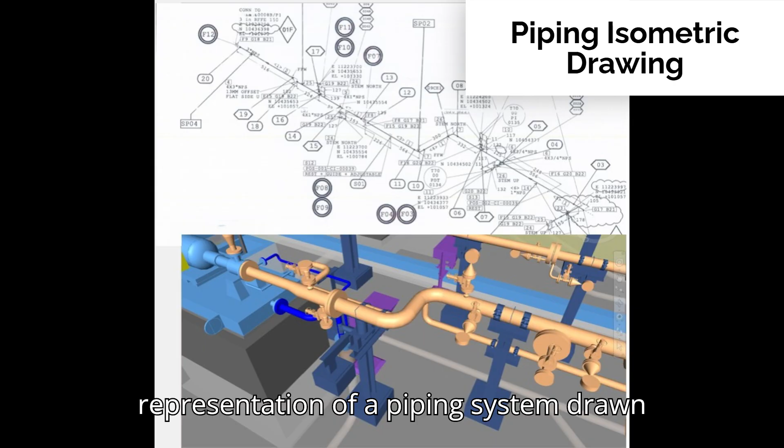What is an isometric? A piping isometric drawing is a 3D representation of a piping system drawn on a 2D plane. Unlike a floor plan or an elevation drawing, an isometric drawing allows the viewer to see the length, width, and depth of a pipe in a single view.

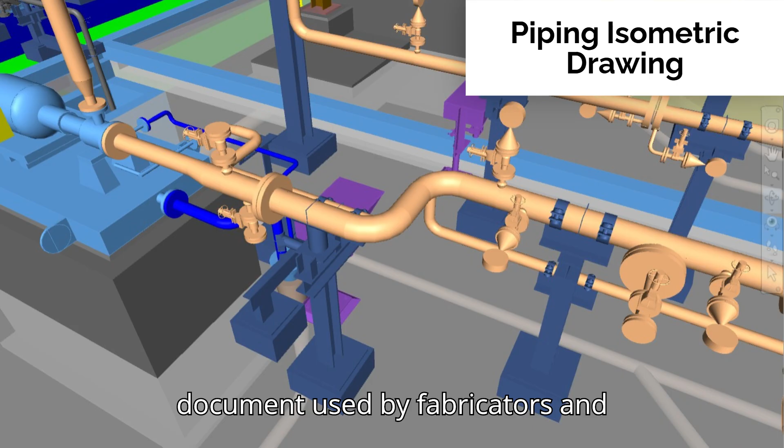A piping isometric is a technical drawing that represents a three-dimensional piping system in a two-dimensional format. It is the primary document used by fabricators and installers because it provides a complete picture of the pipe's routing, dimensions, and materials in one single view.

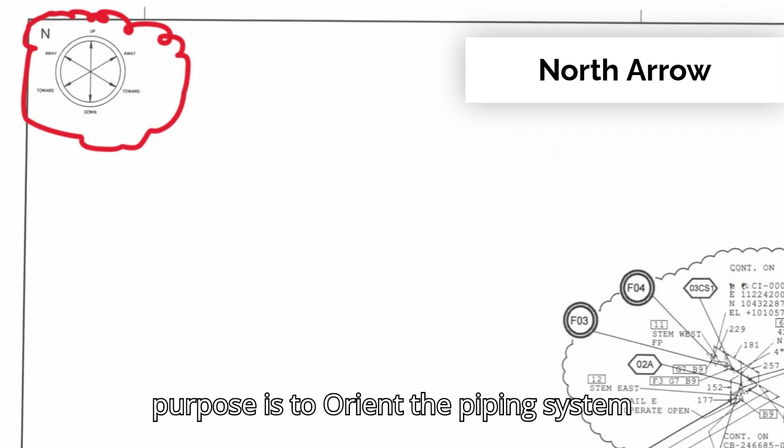North arrow, crucial for orienting the pipe within the plant. Note that plant north might differ from magnetic north. The north arrow is the compass of a piping isometric drawing. Its main purpose is to orient the piping system within the physical space of the industrial plant. Without a north arrow, a fabricator or welder wouldn't know if a pipe should run toward the ocean, the road, or the neighboring tank. The north arrow is almost always placed in one of the top corners of the drawing.

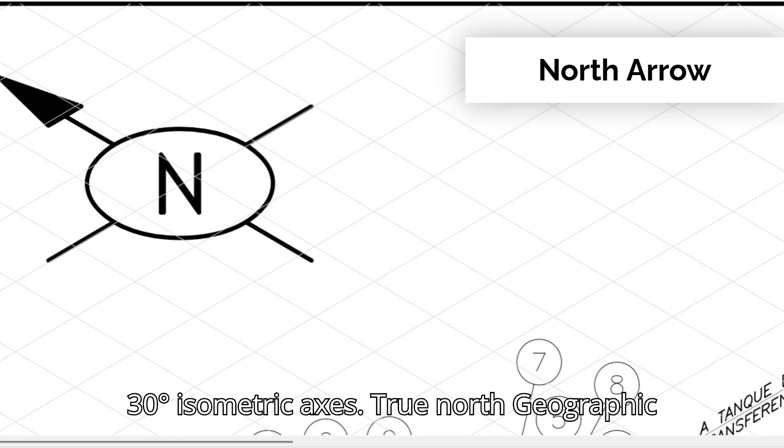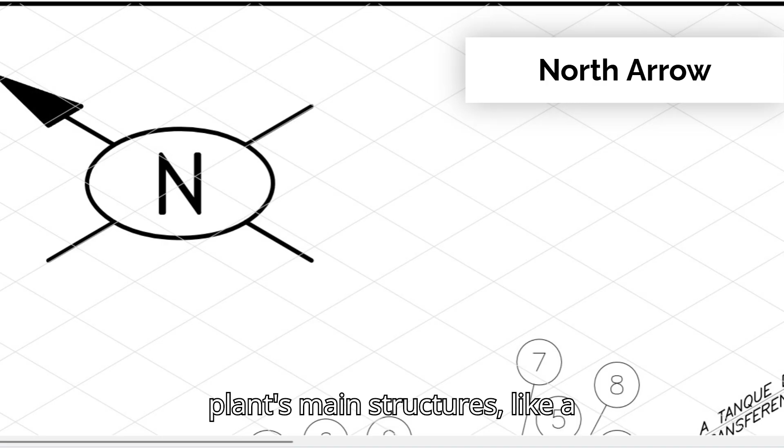It typically points toward the upper right or upper left, aligning with one of the main 30-degree isometric axes. True north, geographic north, the actual direction toward the North Pole. Plant north, project north, a fictional north used by engineers to align with the plant's main structures, like a rectangular building or a fence line. In an isometric drawing, there are no horizontal lines. Everything is drawn on a grid with axes at 30 degrees to the horizontal.

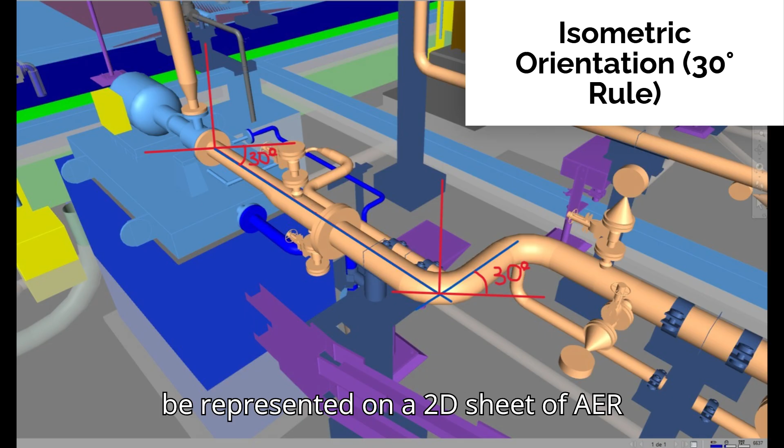This is the central part of the drawing, shown in a 3D perspective, using 30-degree axes. The 30 degrees rule is the fundamental geometric principle that allows a 3D piping system to be represented on a 2D sheet of paper without using perspective. It creates a distorted but highly functional view where you can still use a ruler to measure distances. In a 2D drawing, you have X and Y. In an isometric, we simulate X, Y, and Z using these rules.

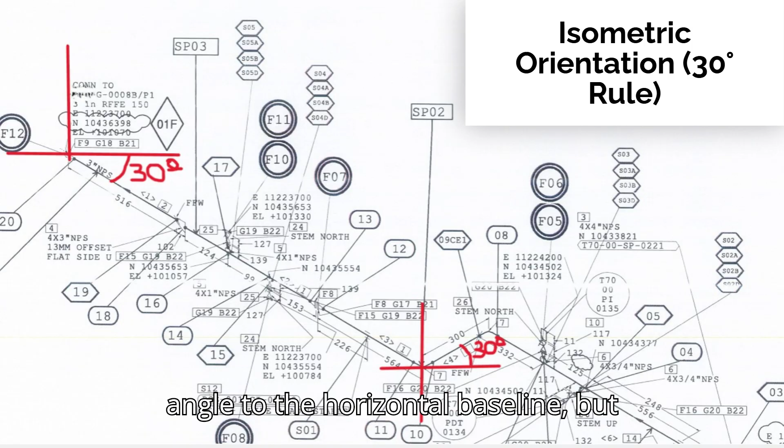Bill of Materials, BOM. The Bill of Materials in a piping isometric is essentially the shopping list or recipe for that specific line. It is a detailed table, usually located in the upper or right-hand corner of the drawing, that lists every single physical component required to fabricate and assemble the system shown. Without a BOM, an isometric is just a picture. With it, it becomes a construction document.

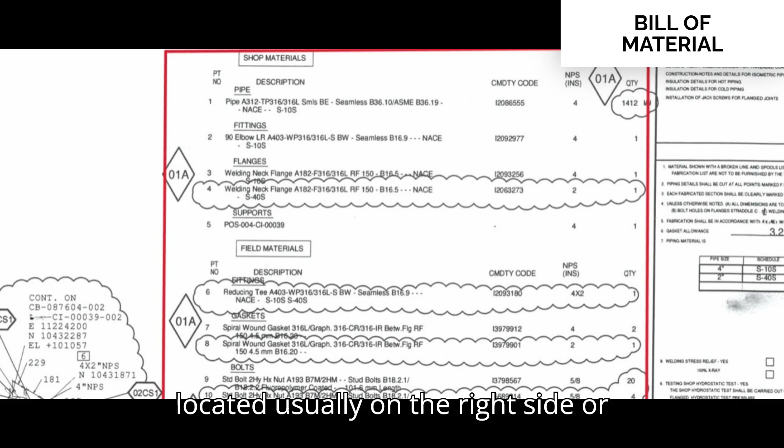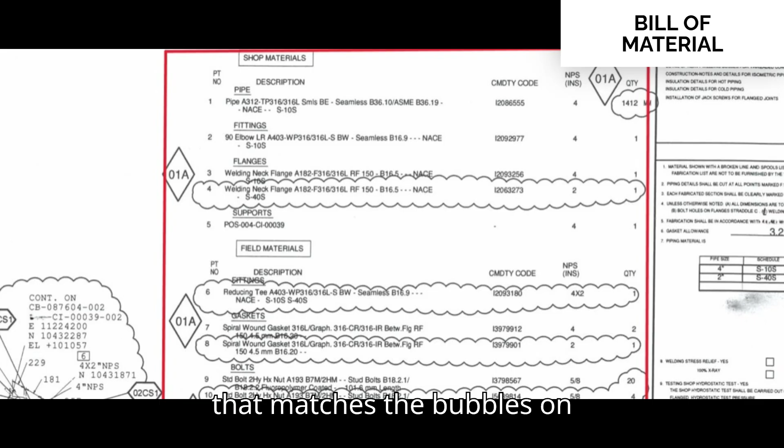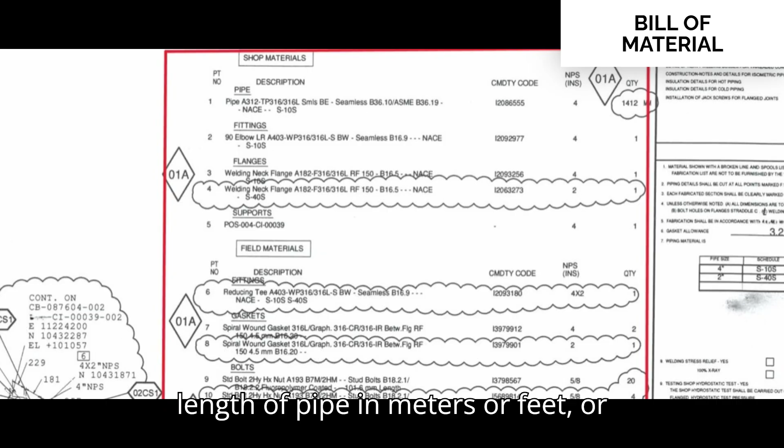Located usually on the right side or top corner, this is the shopping list for the fabrication shop. A standard BOM is divided into columns that provide specific technical data for each part. Item: a reference number that matches the bubbles on the drawing. Description: the full technical name, including type, schedule, rating, and technical specifications, e.g., pipe, seamless, ASTM A106 GR B. Size/NPS: the nominal pipe size of the component. Quantity: total length of pipe, in meters or feet, or the number of pieces for fittings and valves.

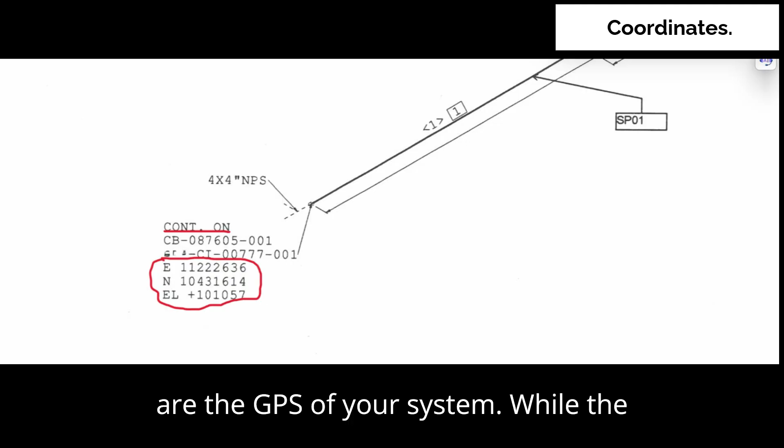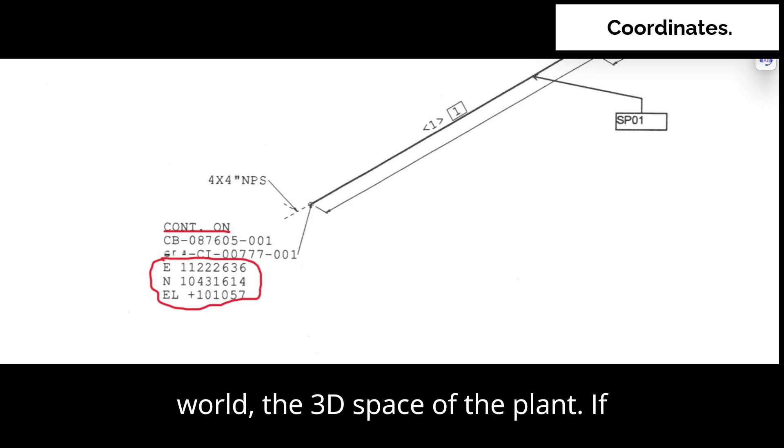Elevations and coordinates. In piping isometrics, elevations and coordinates are the GPS of your system. While the drawing shows you the shape of the pipe, the coordinates tell the installers exactly where that pipe sits in the real world, the 3D space of the plant. If you get these wrong, your pipe might end up trying to occupy the same space as a structural beam or another pipe, a nightmare called a clash.

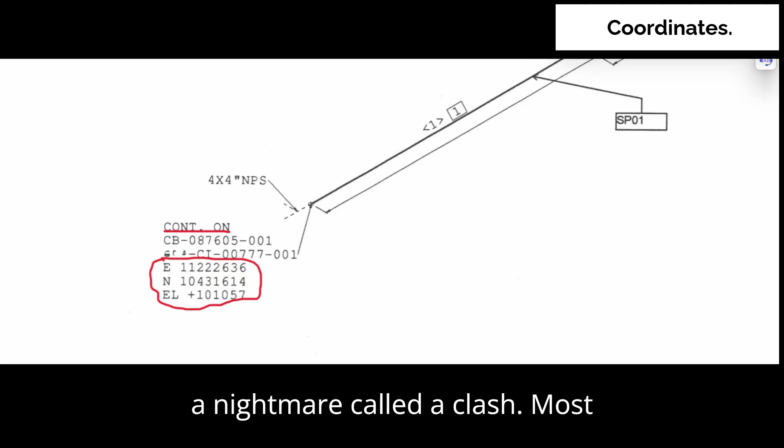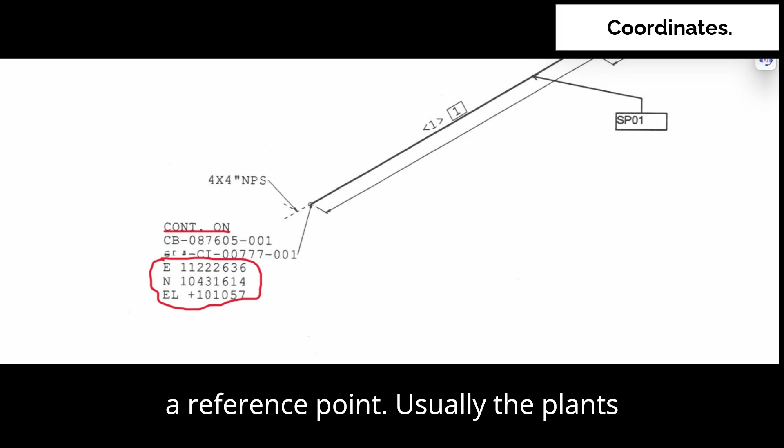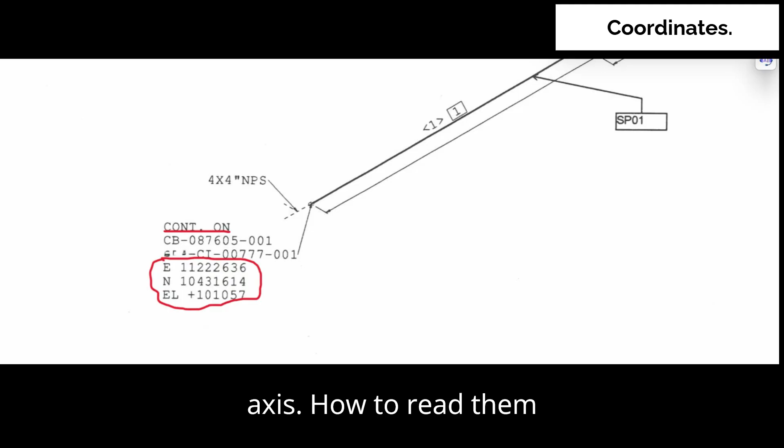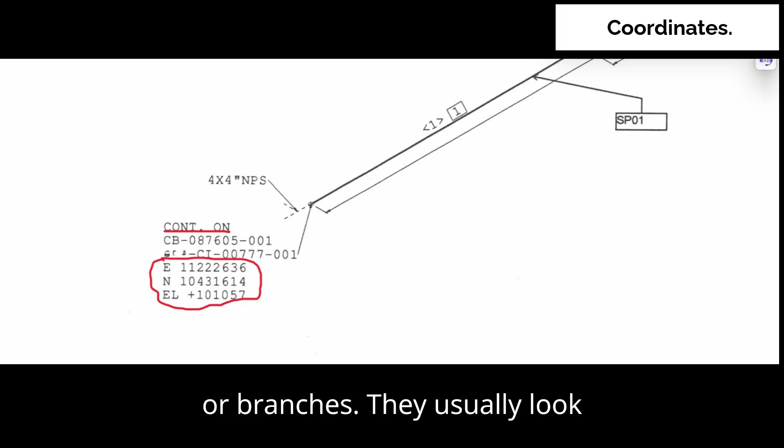Most industrial plants use a grid system. Instead of X and Y, we use northings, N or S, the distance from a reference point, usually the plant's 0 point, along the north-south axis. Eastings, E or W, the distance along the east-west axis. How to read them: on an isometric, you will see callouts at every change of direction, elbows, tees, or branches. They usually look like this: N 105,250, E 200,400. Elevation, EL.

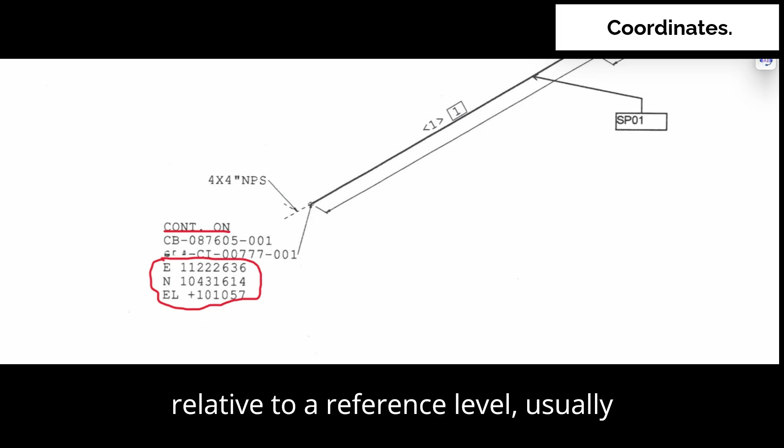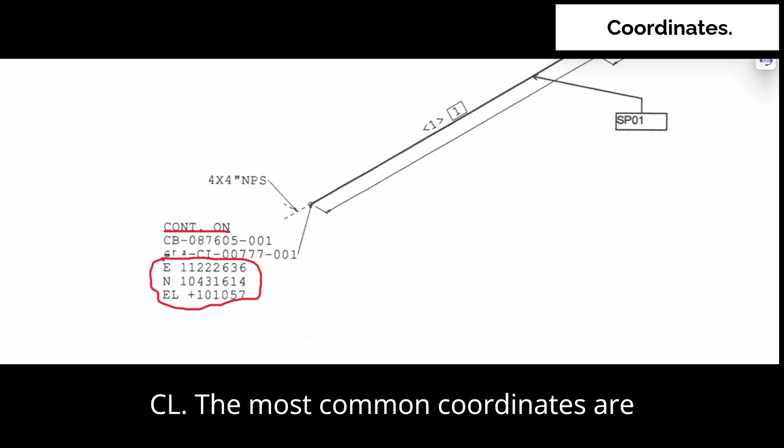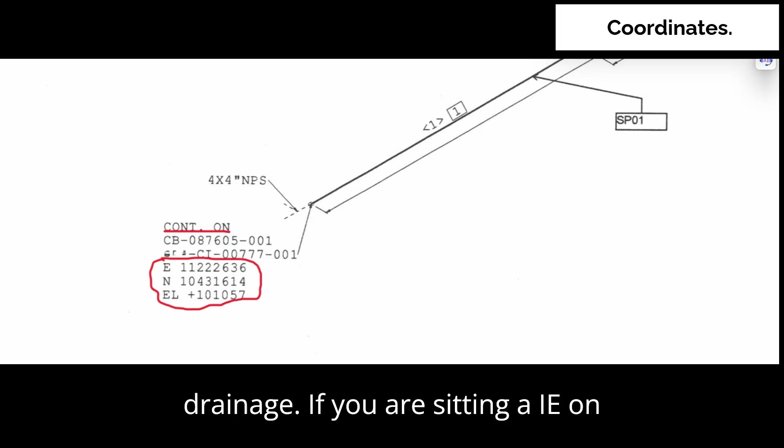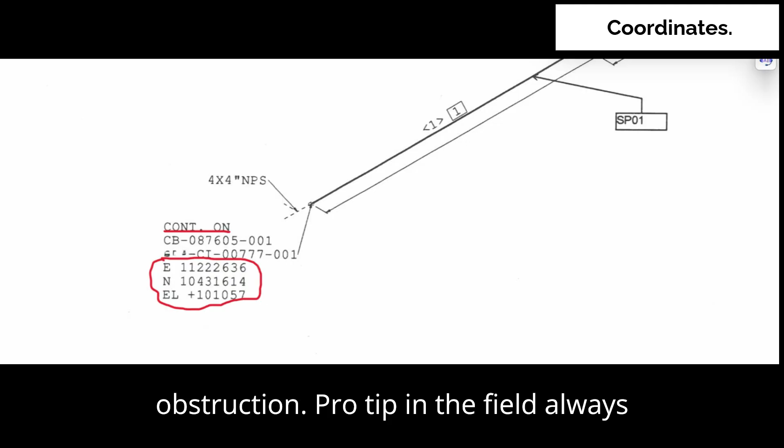Elevation represents the vertical height, Z-axis, relative to a reference level, usually sea level or a finished grade defined as 0.000. Centerline, CL, the most common: coordinates are usually given to the exact center of the pipe. Bottom of pipe, BOP, critical for pipe supports and drainage. If you are sitting a pipe on a steel beam, you need the BOP. Top of pipe, TOP, often used for clearances or when a pipe needs to pass under an obstruction. Pro tip: in the field, always ask, is this elevation to the centerline or the bottom of pipe? A 24-inch pipe has a 12-inch difference between the two.

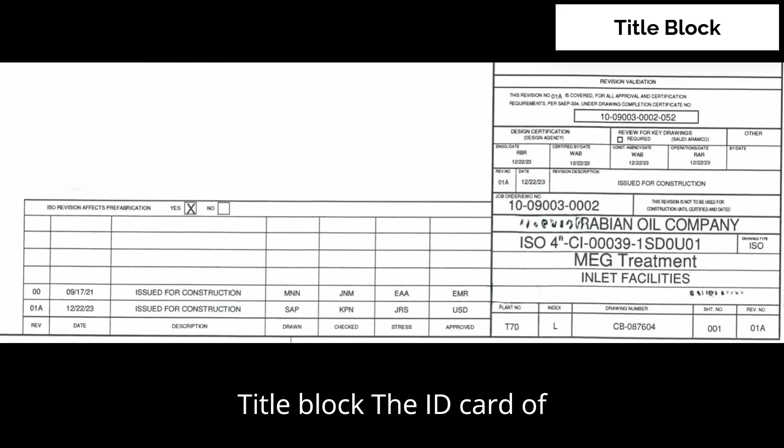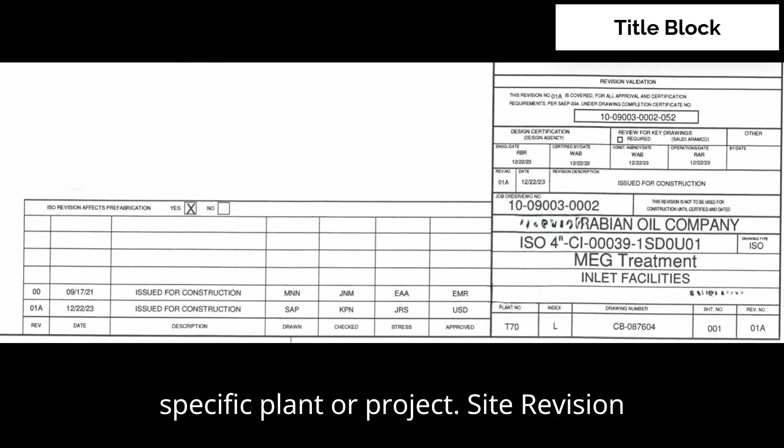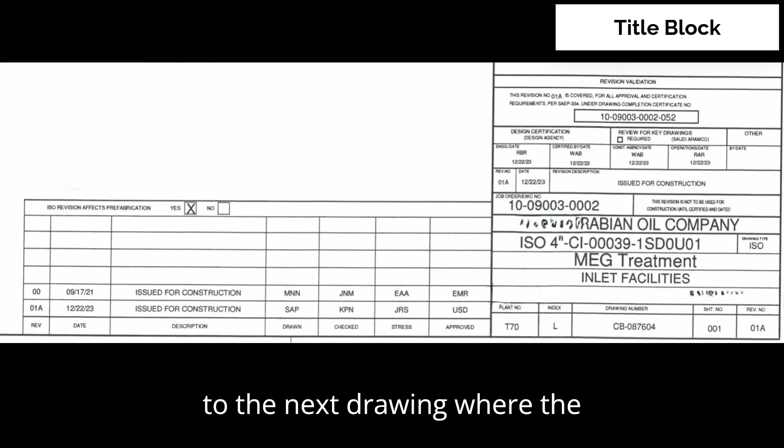Title block, the ID card of the document. Line number, the unique identifier for the piping system, essential for tracking. Project name, the specific plant or project site. Revision table, the history of changes to ensure you are working with the latest version. Continuations, references to the next drawing where the line continues, e.g., continued on ISO XXX. Let's check this isometric.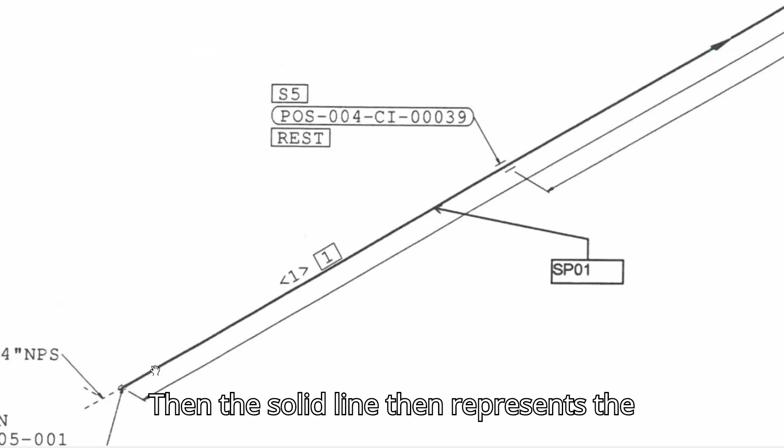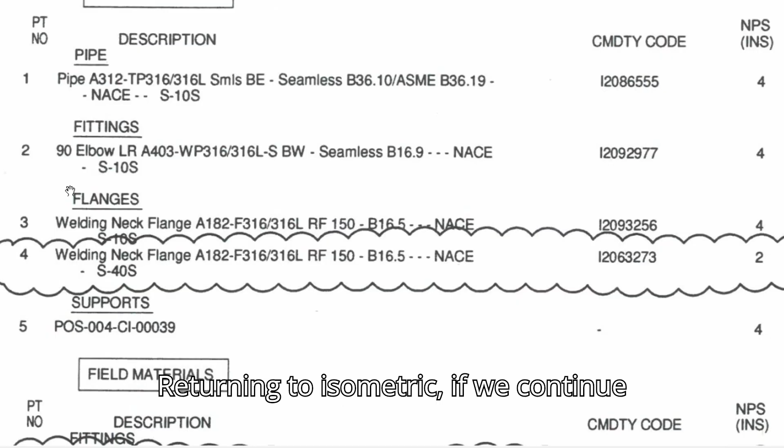Here we can see the line discontinued, which in the context of piping isometrics shows the continuation isometric. In this case, it shows 1 equal tee 4 by 4. Then this solid line represents the pipe within the isometric drawing, with this flow direction. Item number 1 in the bill of material is pipe, stainless steel 316/316L, seamless. You can also see that the diameter is 4-inch and the pipe schedule is 10S. Returning to the isometric, if we continue with the next item, we can see this box that represents spool number 1, then 1 support.

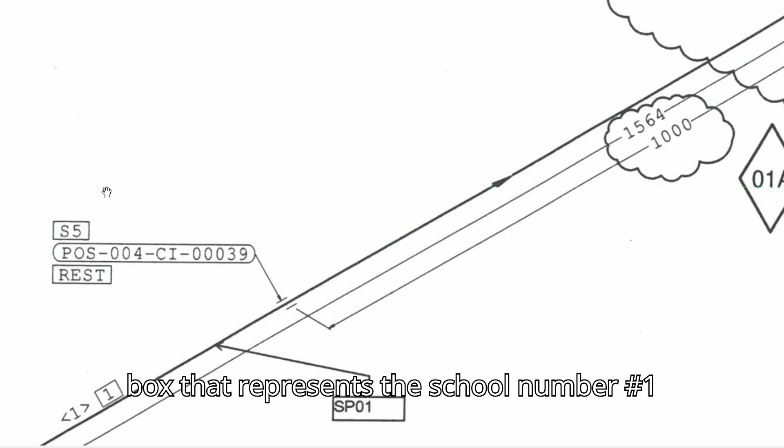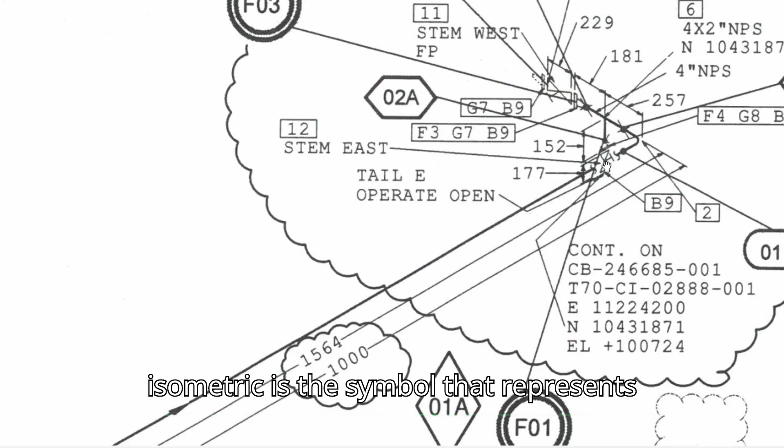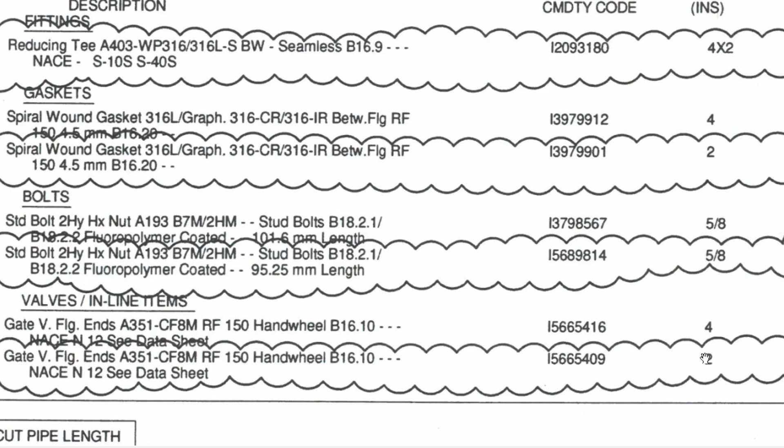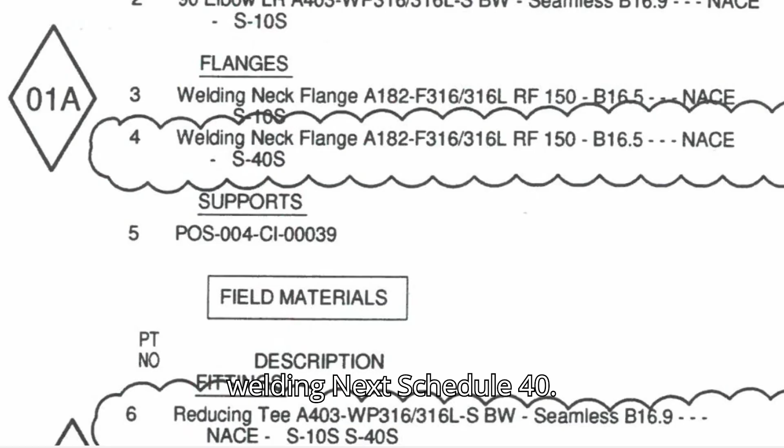Other items that we can see in this isometric is the symbol that represents a gate valve with number 12. Let's see the details in the bill of material. Item number 12 is 1 flanged gate valve in material A351. Let's check at the top the diameter NPS of the valve. In this case, the diameter is 2-inch. We zoom in on the isometric view and see another important fitting. This symbol means 1 flange with item number F4. Item number 4 is a welding neck flange, schedule 40S, diameter 2-inch.

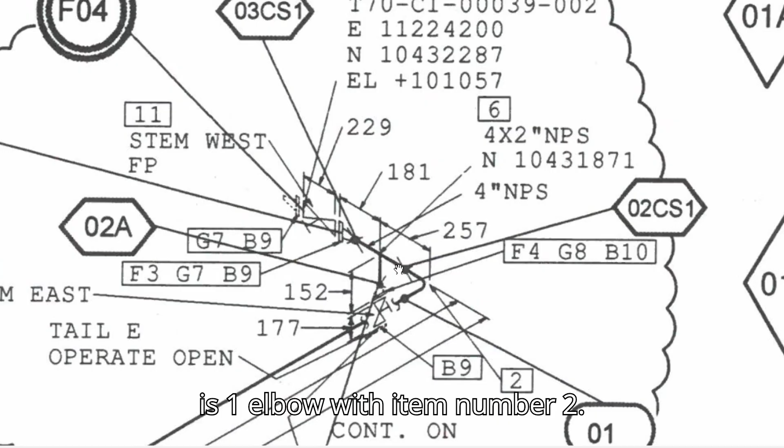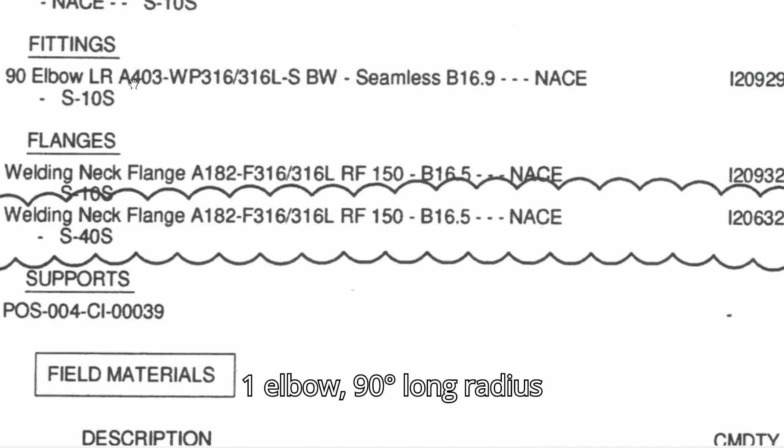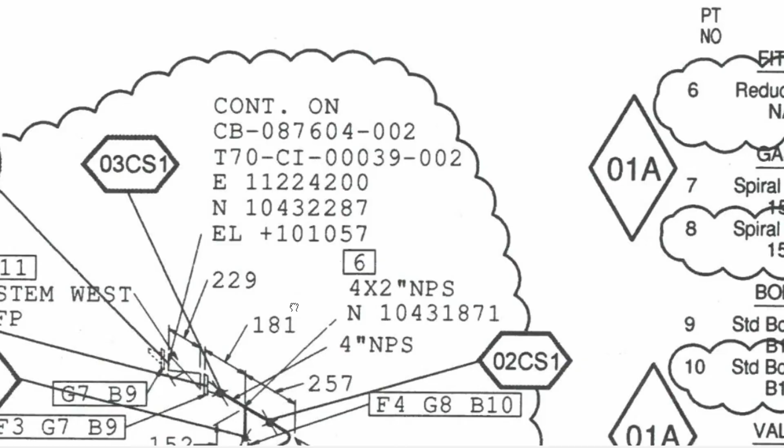The next fitting we can see is the symbol of 1 elbow with item number 2. Item number 2 is 1 elbow 90 degrees long radius with material 316/316L, diameter 4 inches. Then we have this fitting, 1 reducing tee with size 4 by 2 inch.

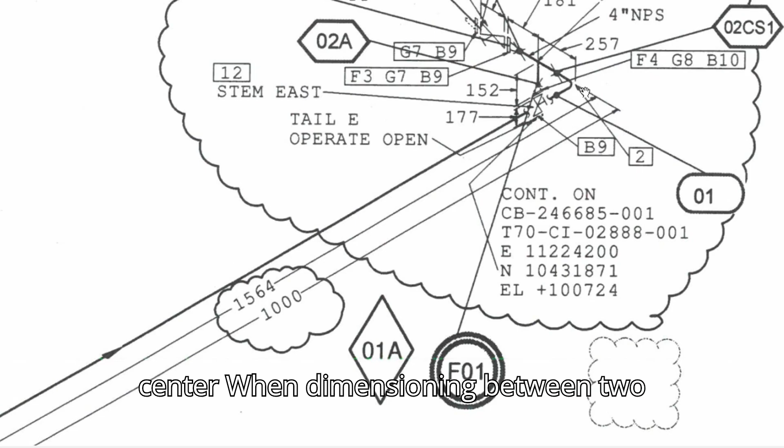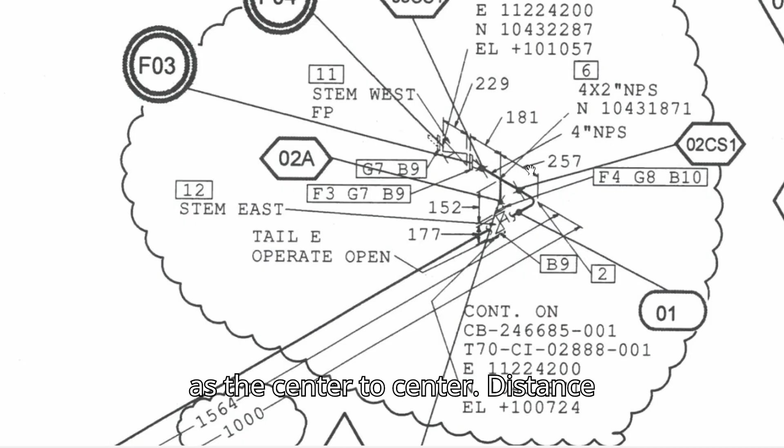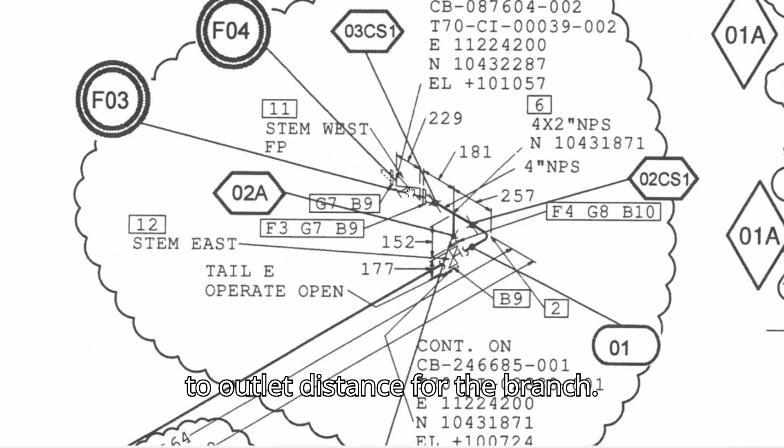Dimensions: distances between centerlines, fittings, or flange faces. Dimensioning between elbows, center to center. When dimensioning between 2 elbows, always measure from the intersection point of the vertical and horizontal centerlines. This is known as the center-to-center distance. Dimension of the reducing tee: for a reducing tee, we must specify the center-to-end distance for the run and the center-to-outlet distance for the branch. Dimensioning flanges, center-to-face: flanges are measured from the centerline of the pipe/fitting to the face of the flange.